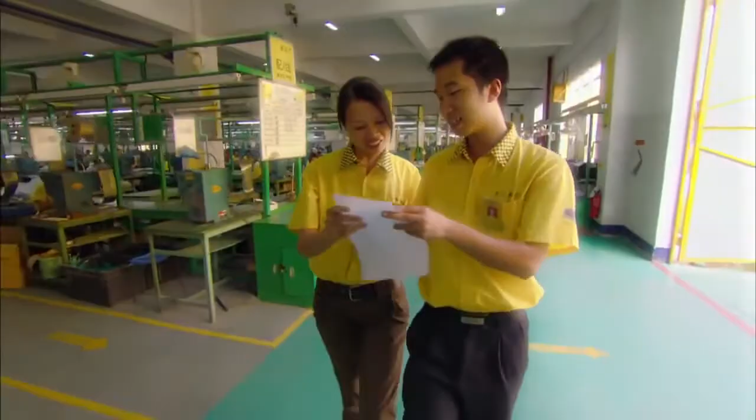What's it like to live where you work? For most of us, that's unthinkable. But imagine living and working at one of the biggest factories in the world, a workplace the size of Monaco. For these 17,000 employees, it's reality. They come from all over China, seeking a brighter future at this factory called Yupa.

Workers craft coffee makers, irons, and electric grills in staggering quantities every single day. But Yupa is more than a steady paycheck. It's home. People get married here, and they send their kids to school here. But the work never stops.

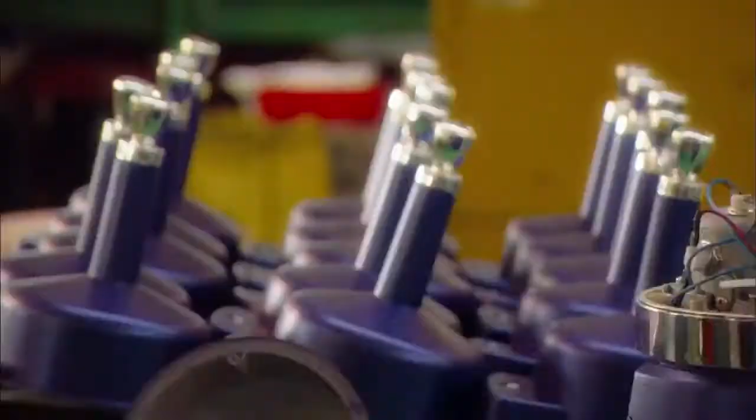Yupa's managers are on a mission to produce new products for every corner of the globe that could forever change the way we think of made in China. Step behind the closed doors of modern China into a factory the size of a city.

Welcome to the place that calls itself Factory of the World. By the time you finish watching this program, Yupa's 17,000 Chinese workers will produce nearly 20,000 electrical appliances.

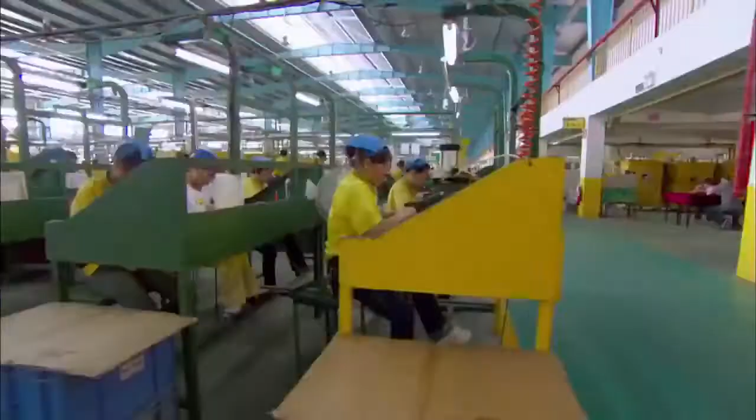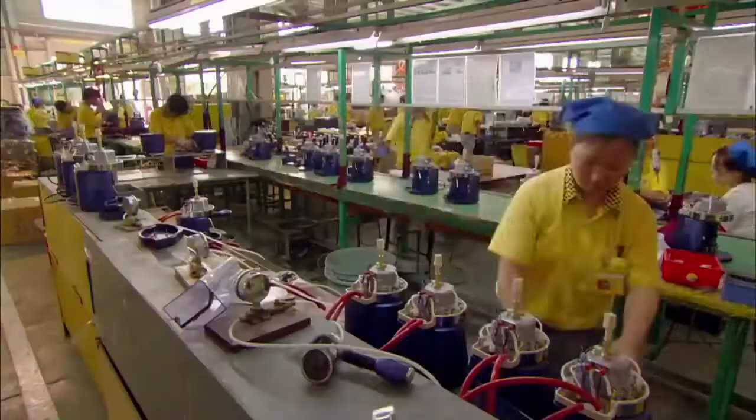Every day they churn out 60,000 irons. Every month, Yupa makes 36,000 coffee makers, that's 2 new machines for every Starbucks on the planet. And every year, these laborers produce a staggering 18 million electric grills. Stacked side by side, they'd span the Atlantic from New York to London.

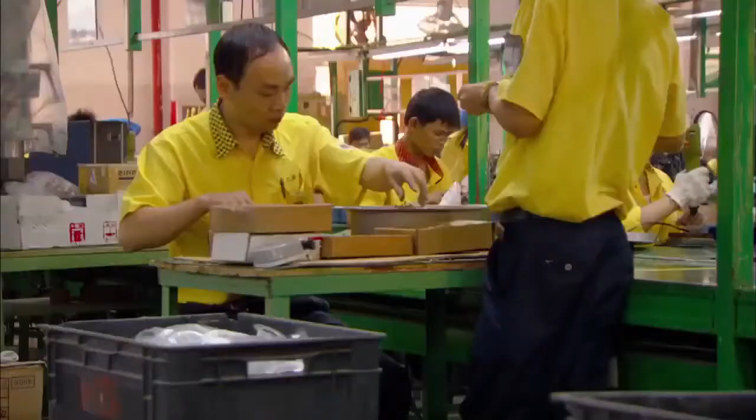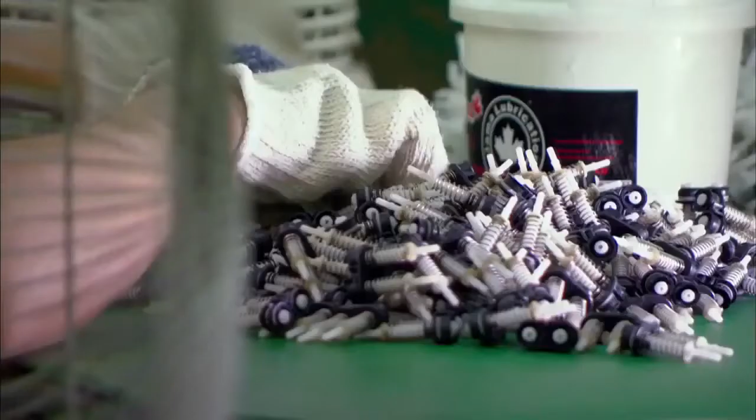Chances are you own something built right here. Factories like these don't exist in North America or Europe, but they're not uncommon in China, where labor is cheap. Yupa runs on human sweat alone. No need for robots. To ensure non-stop production, workers need a steady stream of parts.

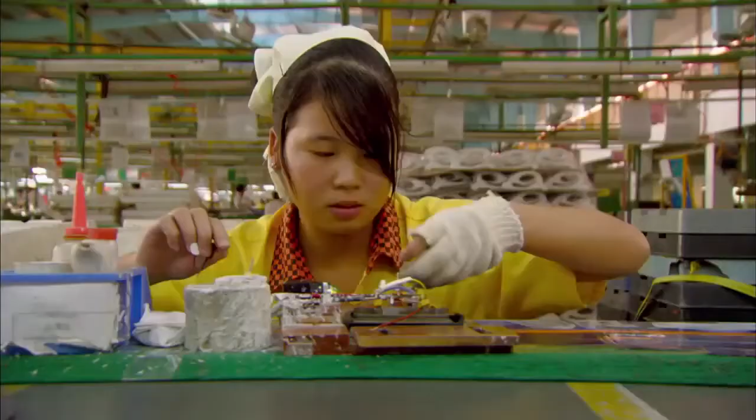The production line cannot wait. We have to guarantee that our production is smooth. Running out of materials would affect our efficiency, affect our productivity, and affect our revenue. So I have to fix this in the shortest time possible.

Today, a problem at the iron factory needs smoothing out. Workers on the iron line are low on a crucial part.

To keep up production, they need 2,000 units, and they need them now.

Just now I found out the main problems here at the iron department. One major problem is the case for model 603. They need 2,000 right now.

Traditional plants use outside suppliers for their components, not Yupa. To slash costs and stay competitive, Yupa builds its own parts on site. So Mr. He's supplier is only a bike ride away.

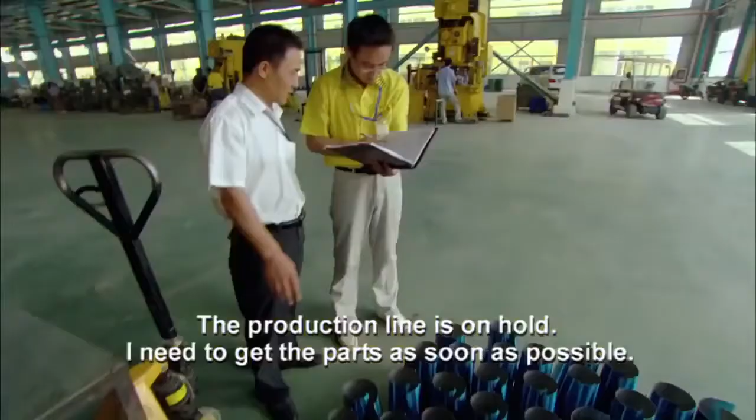But even the supplier is dangerously low on stock. Mr. He has found barely enough parts to last the day.

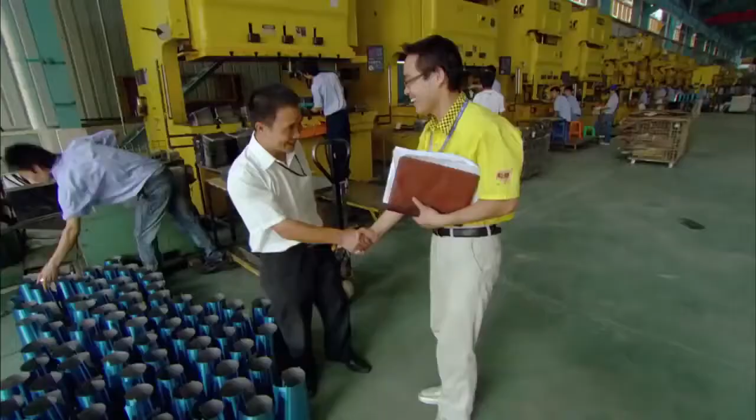Then he gets another urgent call, now the grill factory is low on a crucial component.

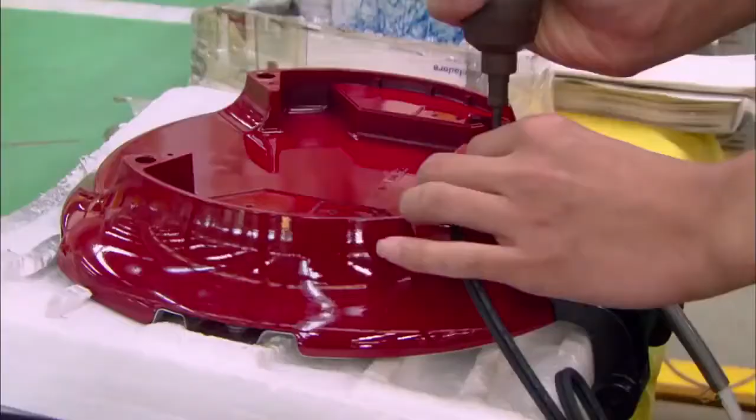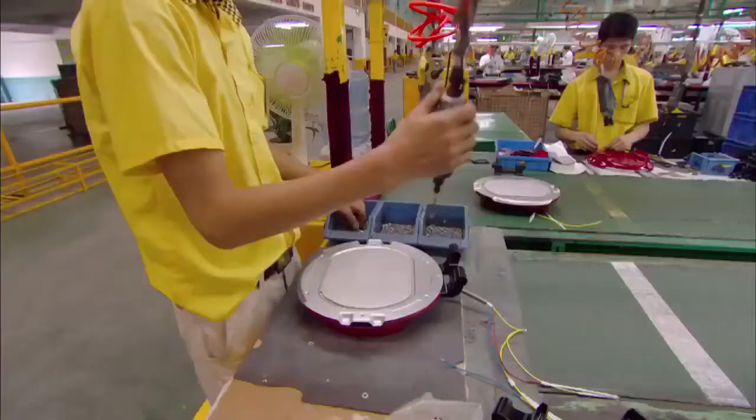Grills are the company's most profitable products. Yupa started producing one line of grills in 1994. Now, 60 assembly lines churn out 800 different models. Workers make one grill every 12 seconds. That's 50,000 grills per day, or 1.5 million per month, enough grills for every person in Dallas. Grills bring in $350 million a year, but Yupa wants more.

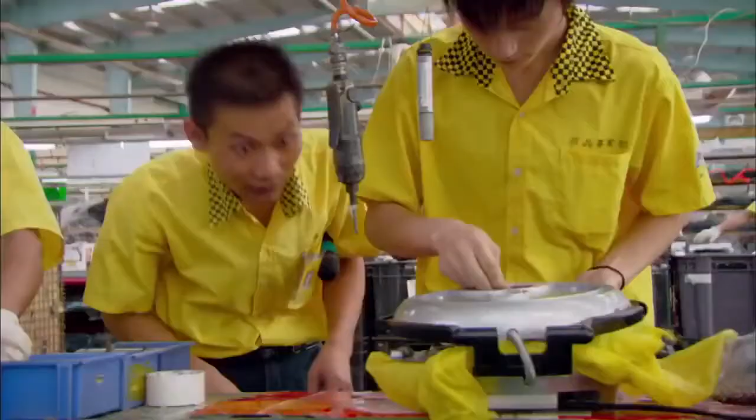Little wonder Lu Jinye acts like a general leading his troops to war. By next year, managers expect workers to crank out $500 million worth of grills. Yupa's profits have to rise to outmuscle the competition.

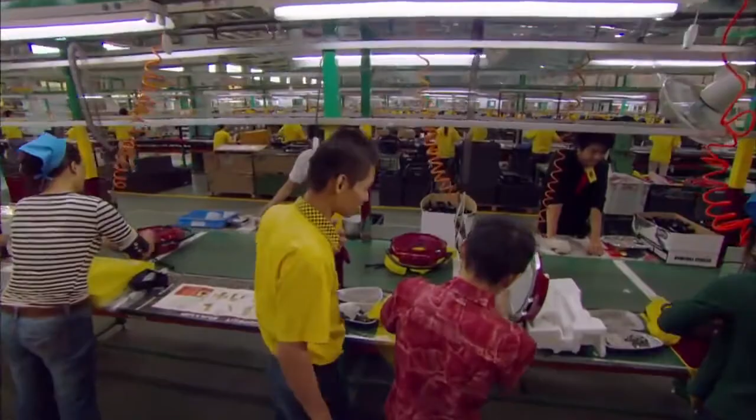Mr. Ye supervises 850 workers on 30 lines. We have to coordinate all these workers and pull all their thoughts into one. It takes teamwork to accomplish our goals, to get the results we want.

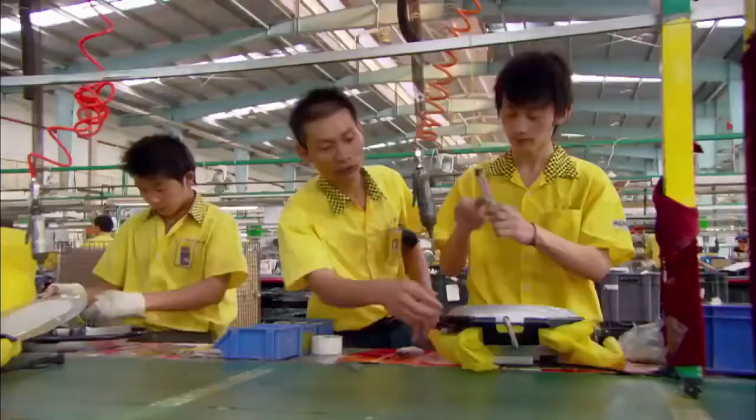Mr. Ye is obsessed with quality control. His aim? Boost output without compromising quality. In a factory this big, with a production run so massive, even the hyper-efficient Mr. Ye hits a roadblock.

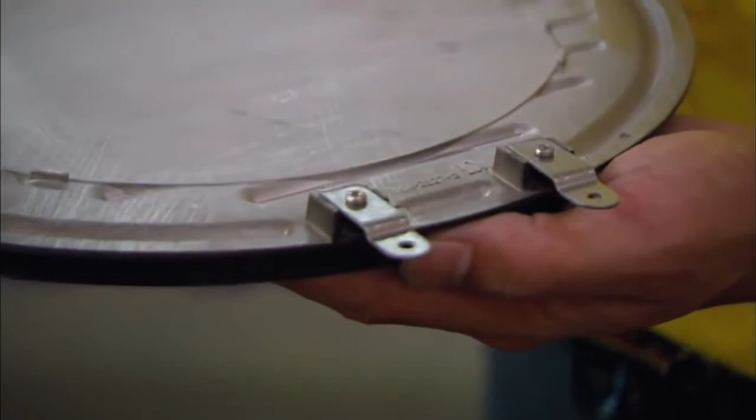This holder piece holds the grill plate. What we're seeing now is the assembly of this piece. The problem is the size. It's the wrong size.

They've run out of part number 2627. It attaches the core heating element to the frame. Without this simple component, assembly lines will shut down, unless Mr. Ha finds a fresh supply, and soon. If we don't get them the parts, 6 production lines will have to stop.

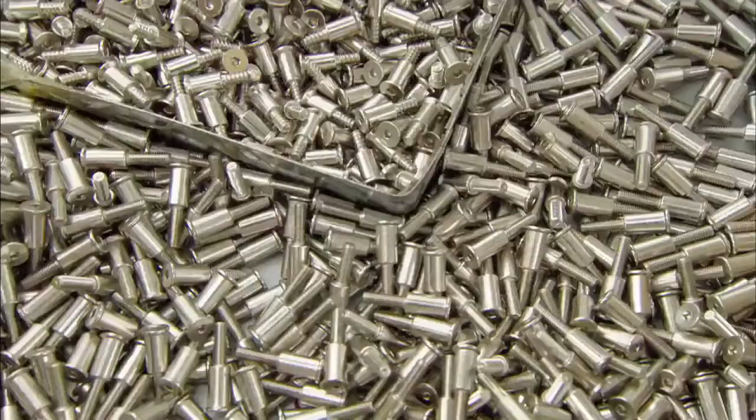When every part is on hand, grills assemble like a simple puzzle. Wires are linked to the heating element, and the element is fixed to the plate.

When it's not locked down properly, it will fall off. If it falls off, it will burn the hands of our customers and consumers. This job is very important.

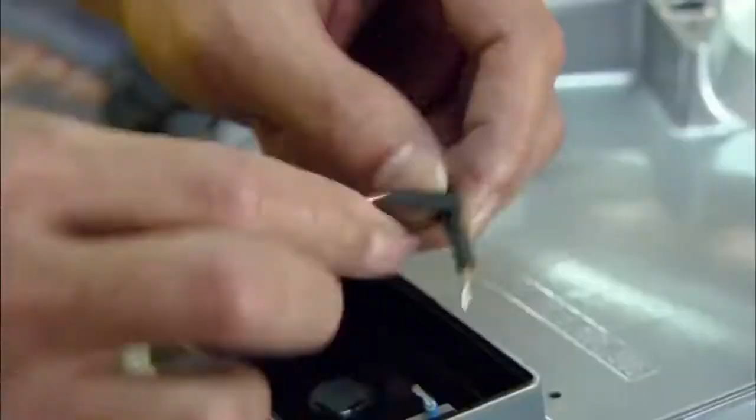Then it's time to connect the power cord. The brown wire is live and the blue wire is neutral. The one with the writing on it matches the brown wire. Connect them and that makes the wire live.

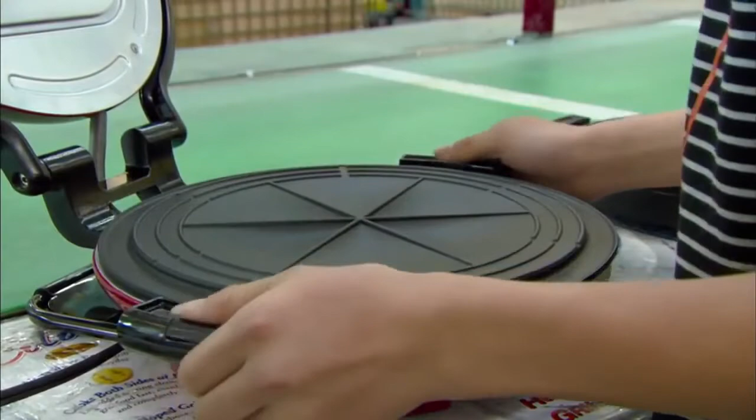Each grill is inspected for flaws in construction or appearance. Finally, every grill is tested to make sure everything is in working order.

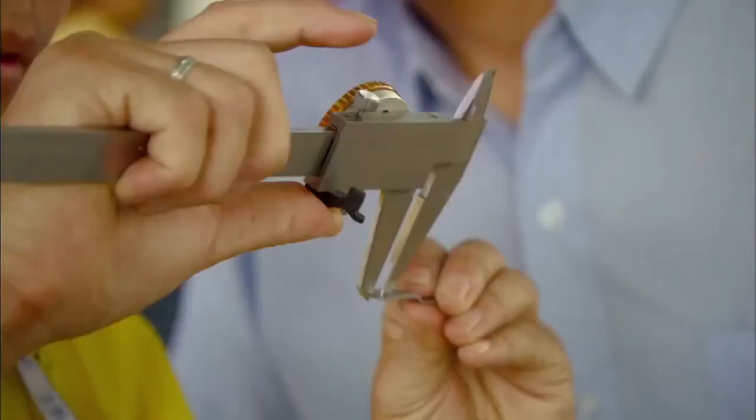On a typical day, Mr. Ye's team must make 700 of Yupa's 50,000 grills. Missing parts cause delays, cost Yupa a fortune, and force workers into overtime to meet their quota. Finding the missing parts falls to Mr. Ha, and the pressure is on.

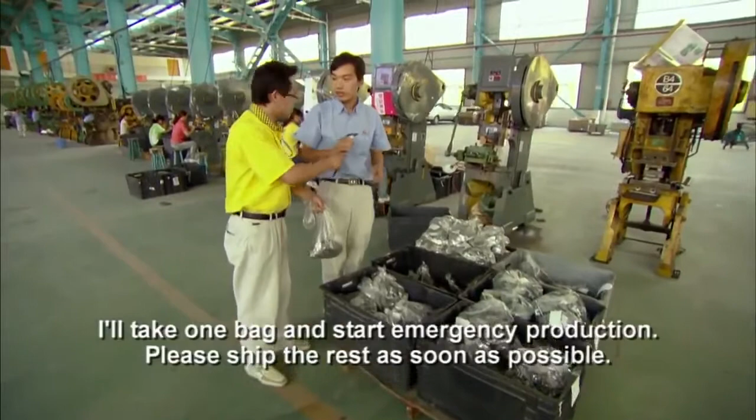Mr. Ha finally arrives, and he has good news.

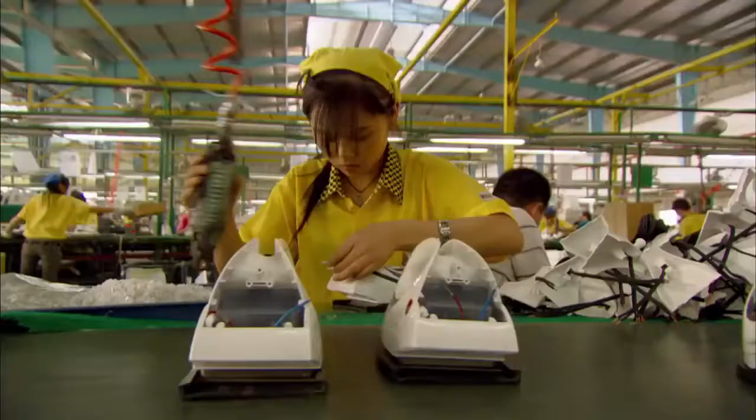It's a place tourists never see. The new face of modern China, competitive, hungry for profits, and ready to take on the world. Located near the city of Xiamen, the EUPA complex sprawls for 1.8 square kilometers, almost the size of Monaco.

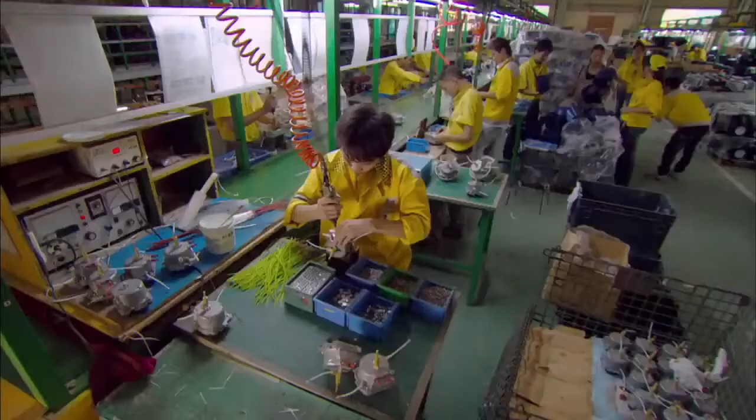We have about over 20 buildings here. The largest building is equal to about 4 football fields. You can have 60 to 70 assembly lines. Each assembly line can have 25 to 35 workers in the line.

25 years ago, there were no factories here, only farms. In the 1980s, the Chinese government decided capitalism wasn't so bad after all. The communist regime established so-called special economic zones, designated places for free markets and foreign investments.

EUPA, a Taiwanese company, moved here in 1988. In a few short years, it became the largest manufacturer of irons, electric grills, and espresso makers in the world. EUPA is a city unto itself, with restaurants and convenience stores, soccer fields and basketball courts, and living quarters for everyone from students to families.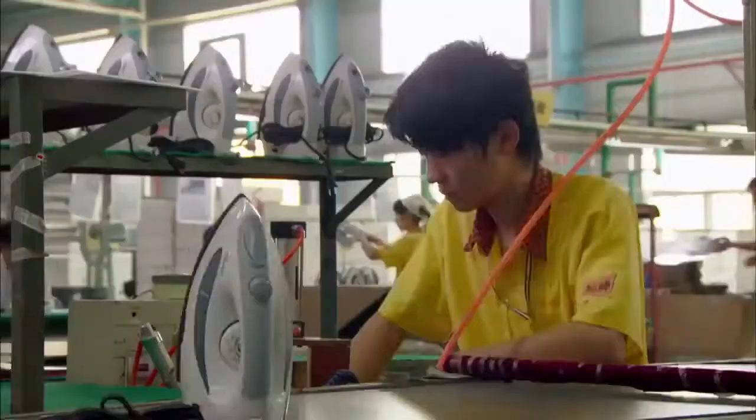Success made it big, and size keeps it successful. Mass production runs push down costs. Almost all parts are made on-site, keeping supply costs low and parts within easy reach.

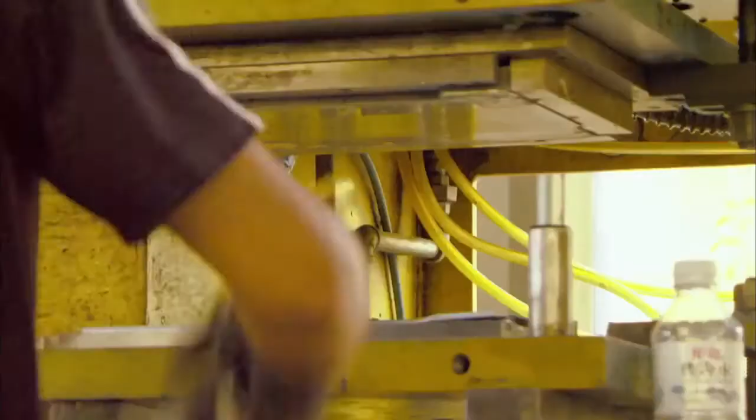Because we are in this location, pretty much isolated, we don't have satellite suppliers surrounding us to build parts for us. So we had to do it in-house, and we had to do it on a large scale.

Yupa's main advantage is a cheap and endless labor force, ready to work for a fraction of a Western wage. 16-year-old Mao Fen Guao left her family and came here in 2008.

But Guao isn't just looking for work. She's here to escape poverty and make her mother proud.

In China, many parents prefer sons to daughters. My mother has only 2 daughters. She's always upset about that. And in order to not let her down, I must work harder and harder.

Guao is a worker in training. With about 1,000 other students, she attends Yupa's on-site trade school. To get here, she had to pass entry exams and pay Yupa tuition. Now she's enrolled in 3 years of study and hands-on training at the factory. If she does well, Guao hopes for a job at Yupa.

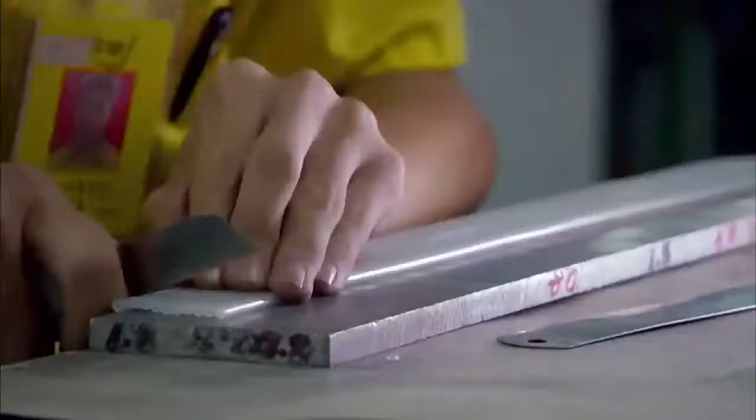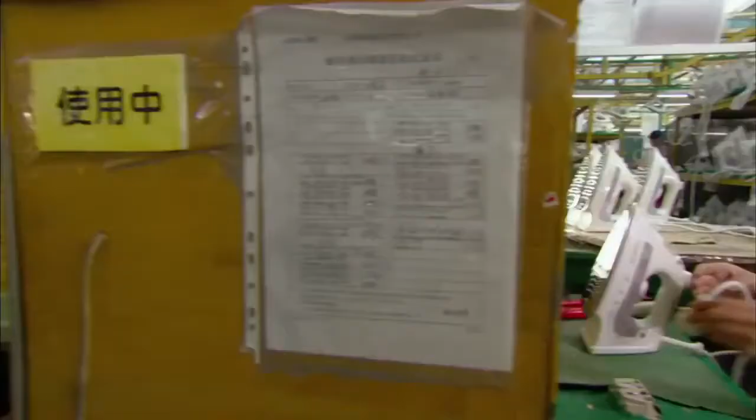To get a job, Guao must learn the ins and outs of every product line. We're changing constantly. Last time, we were making grills. Then we changed to coffee makers, and now electric irons.

Workers on 27 production lines pump out an iron every 15 seconds, and as many as 60,000 irons a day. Production includes at least 10 separate brands for dozens of companies.

With over 30 steps to assembly, iron making is intricate work. And there's no room for error.

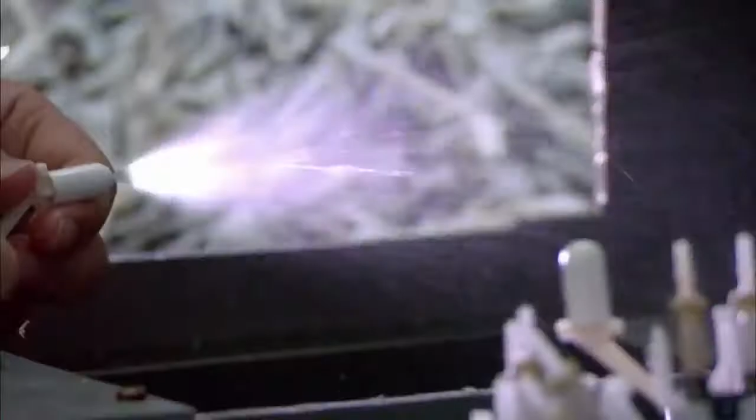Assembly starts with a water spray unit, made up of springs, rubber, and washers. With training and practice, it snaps into the spout in seconds.

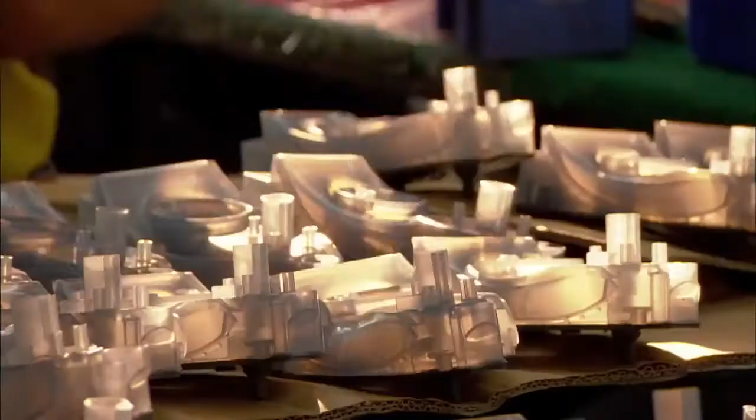If it's not closed tight, it will leak or blow. Then it won't work properly. Now the sprayer and spout are joined to the handle.

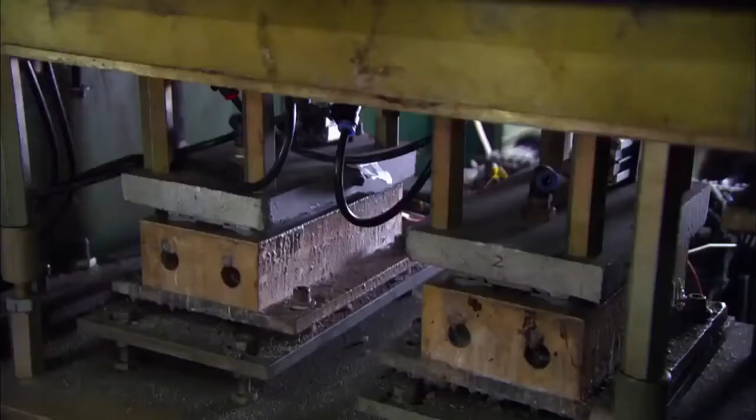The two parts of the water reservoir are placed in a heating machine. That melts the space between them and makes the reservoir watertight.

Welding is an important part of production. However, it will be easy as long as we follow our operational guidelines. Next, the thermostat is attached to the base.

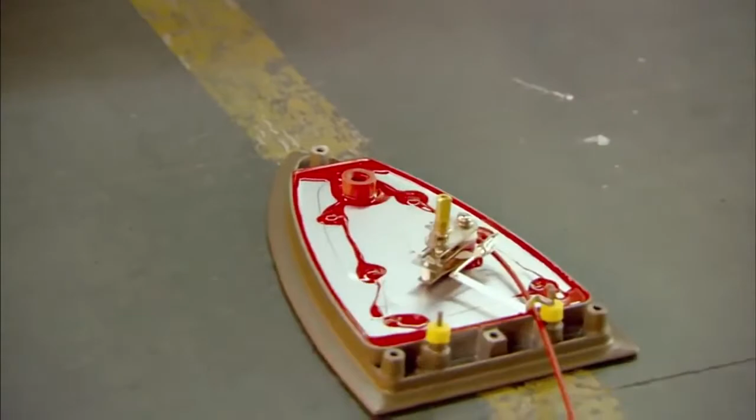You need to make sure you're using the correct format before you insert the base. Using a wrong base can lead to fire. Wiring is also important. Where there is a wiring mistake, there's hidden trouble.

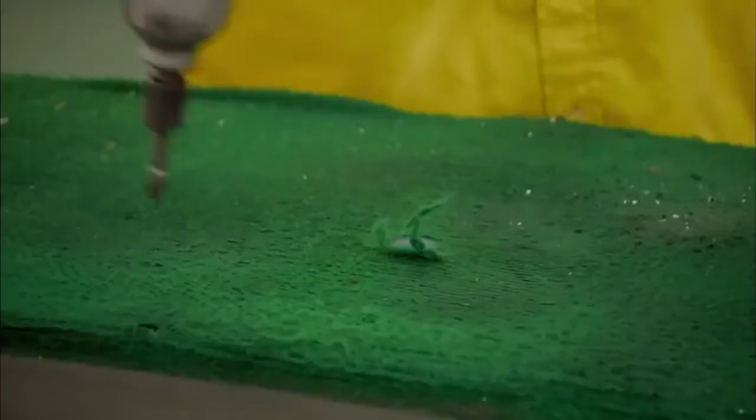A plastic buffer is placed between the heating element and the handle to keep the handle and the user's hand from getting too hot. After that, the plug is welded to the back of the iron.

We're connecting the wire for the power supply. I can do about 4 to 5 pieces every minute and 300 pieces an hour.

Once the spray and steam buttons are attached, it's testing time. First, the steam and squirting functions. Second, the iron's electrical system.

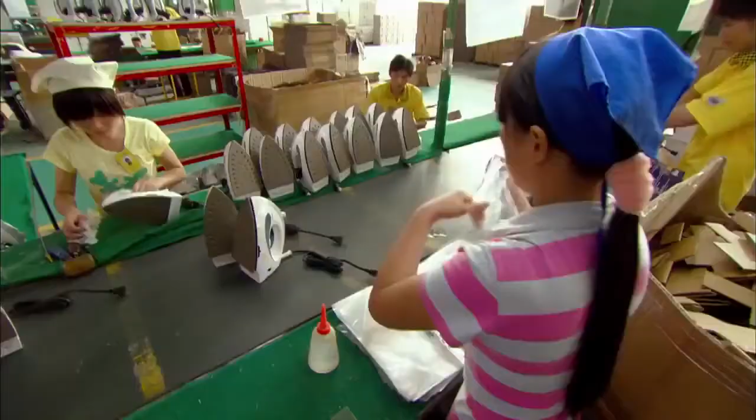Faulty units are either repaired or removed. Finally, irons that pass inspection are packed up and shipped away. The team won't cut corners or settle for second best.

Today, Guo and her classmates will put classroom theory into practice and work the iron line. For a teenager from a small town, living and working in a giant factory can be overwhelming.

My life is not as hard as it was before. I'm getting used to this place now.

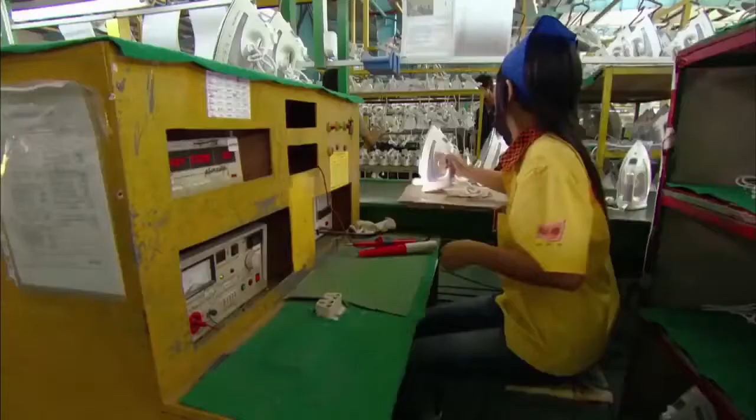Work on the iron line goes better than expected. For Guo, juggling work and school isn't that difficult.

The hard part is leaving family and living far from home.

I guess it's learning how to be independent. When I first arrived here, I didn't know anyone else, and we all have to live together. It was really tough in the beginning.

Like China, Guo is adapting to a new world of high technology and tough international competition. And like China itself, she's determined to succeed.

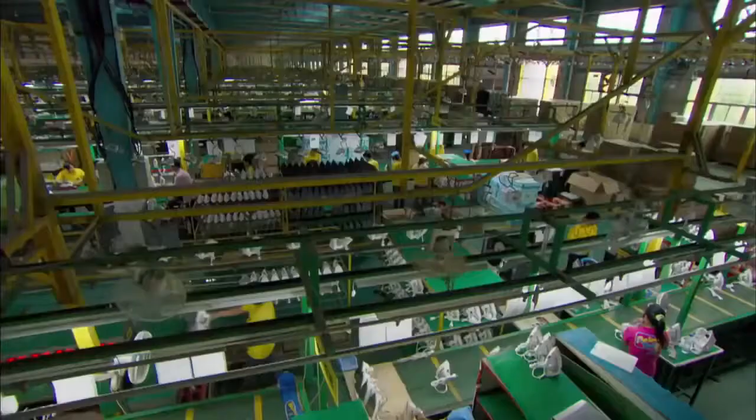I don't see myself working on the production line forever, doing the same job. Maybe I'm a bit arrogant or too confident about myself, but I want a better future.

For some people, a better future keeps them married to their job. Workers at Yupa are married to the company.

Based in southeast China, Yupa is one of the biggest factories on the planet. Today and every day, its 17,000 workers are getting the world ready for breakfast.

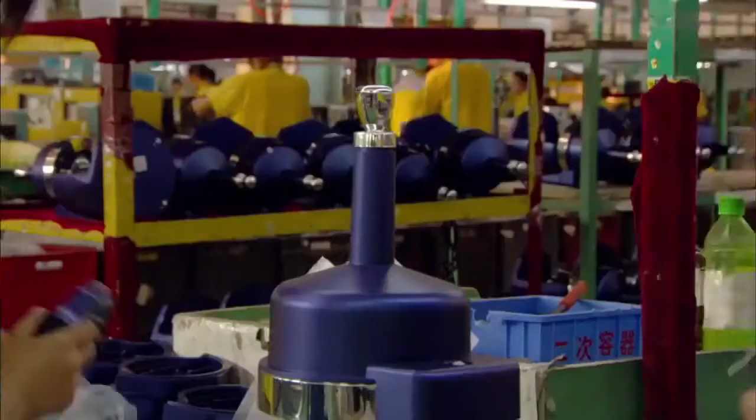In the next 24 hours, it will produce 1,200 conventional coffee makers. Over the next 30 days, these assembly lines will deliver 210,000 cappuccino espresso machines. In the space of 1 year, nearly 2.5 million coffee makers will pour out of Yupa and into the kitchens of the world.

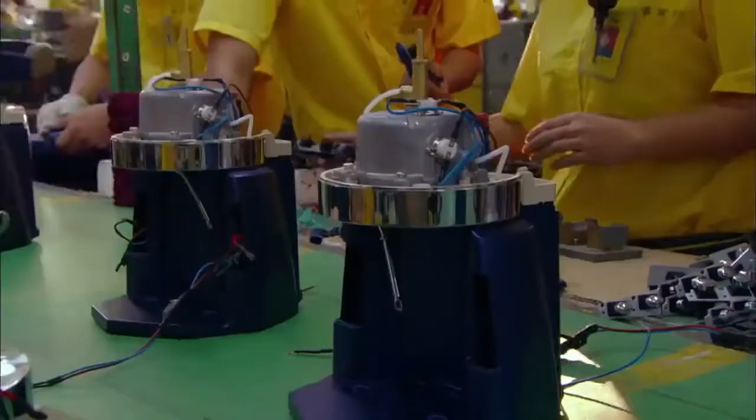At the center of all this is young Lee. We already have 200 or 300 styles, and we develop and add over 40 new styles every year.

Lee's mandate is crucial and broad: tackle any problem that could slow down non-stop production.

We have to make every effort to find these problems and to solve them. We have to make sure that every process is working perfectly. Manufacturing shouldn't be delayed because of these problems.

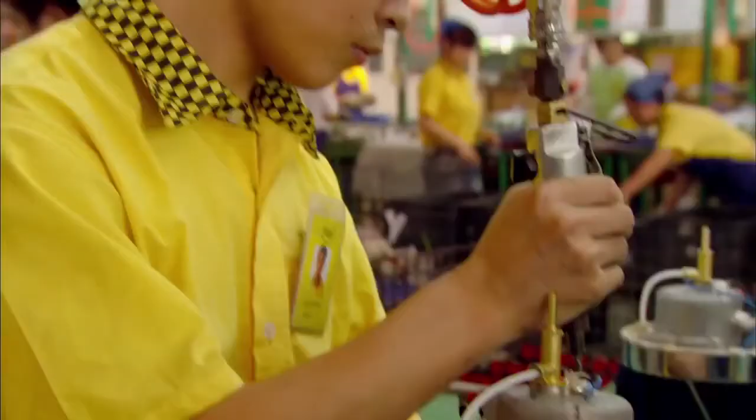Today, he's got a brand new kind of problem. One of Yupa's big clients has designed a new coffee maker. It's up to Lee to build a working prototype to entice the client into going ahead with mass production. Hundreds of Yupa jobs and millions of dollars in potential business are now in Lee's hands.

Making prototypes is a large portion of my job and is vitally important to the development of the company.

Lee starts by assembling the heating system for the water and steam. Then he carefully places it into the main body. Just when Lee's ready to assemble it all, there are parts missing.

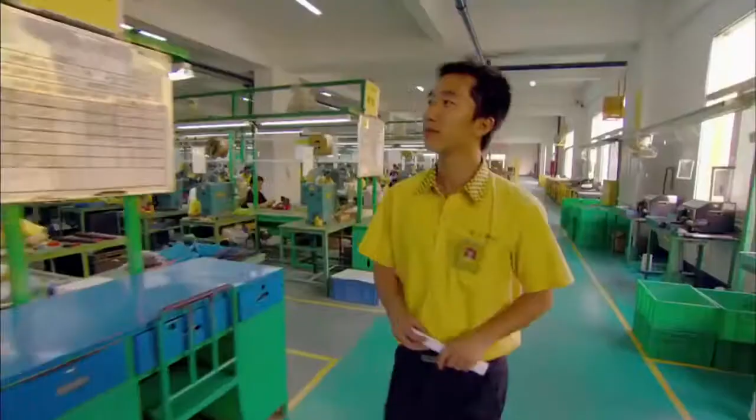The supplier is just a walk away, a long walk, but Lee doesn't mind the distance. Someone special is waiting for him at the supply depot.

The person helping him today is his girlfriend. These perks make Yupa more than a place of work. With a workforce of 17,000, many of them married with kids, this factory city turns office space into personal space.

Sometimes we work together. For example, if we need help from the technician to solve production problems, then we meet each other afterwards.

Li Yang Lee works in the parts supply department. She first came to Yupa in 2004.

We fell in love at first sight. I always think it must be God who makes her work here and wait for me. Even now, I still think the same.

Yupa management encourages these intimate connections. They believe couples that work together are more loyal to the company.

By working in the same company, we can go to work together and take care of each other. We can see each other more often. What's more, we can be with each other when we have a problem.

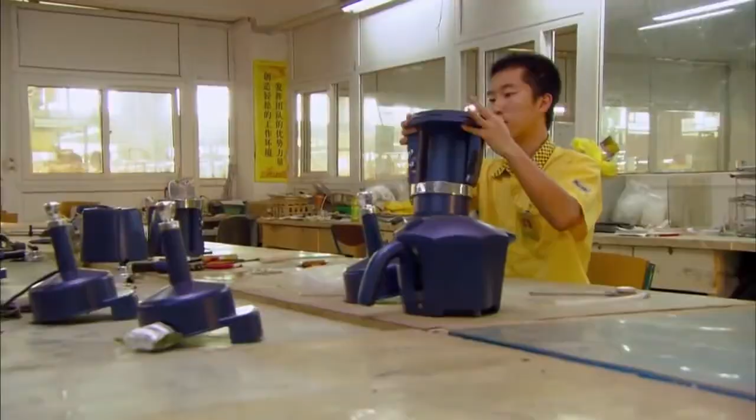With the missing parts in hand, Lee is ready for wiring. Making it all fit into the chamber isn't easy. I will have to organize all the electrical wires properly to make sure the coffee maker operates safely.

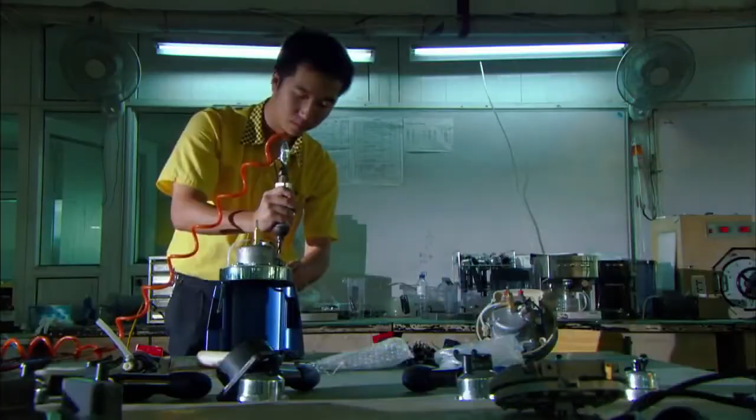But the real test will come after shipping. If the client approves of Lee's model, Yupa could get a massive order. If it doesn't, hundreds of jobs are on the line.

If I make the prototype in a sloppy way, our customers will lose confidence in the quality of our products. It will be a great loss to our company.

Weeks later, Lee's model is approved for mass production, and right away he sets out to create a brand new production line.

It takes a week to prepare the assembly line and train the workers to make the new coffee machine.

Making a coffee maker is not an easy job at all. It requires professional knowledge and a profound understanding of coffee culture.

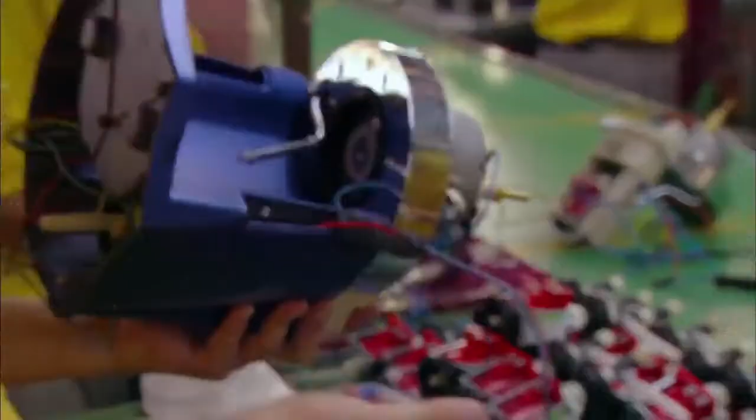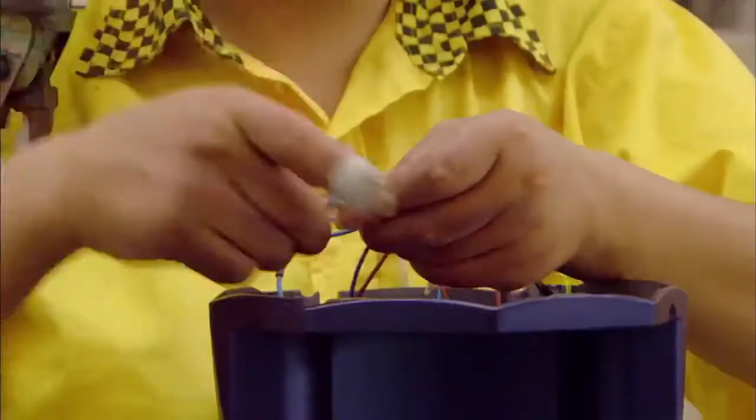When the prep is done, Factory City springs into action and works with astonishing speed. Lee's prototype took half a day to make. Now line workers churn out 700 machines a day.

Lee's shift is done, and when work ends at Factory City, romance begins. When we're done work, we normally go shopping together or take a walk. It gives us a sense of happiness.

The couple plan to get married at a mass wedding, paid for and organized by the company. All at once, dozens of Yupa workers will tie the knot, while thousands of co-workers look on.

If we take part in the group wedding, with the best wishes of all of our co-workers here, we know we will be getting married in the factory of the world, one dream, and that would be unforgettable. A mass wedding is the couple's way of showing their love for each other and their passion for Yupa.

Chef Xingming Li has a passion of his own, feeding the 17,000 workers that power the factory of the world.

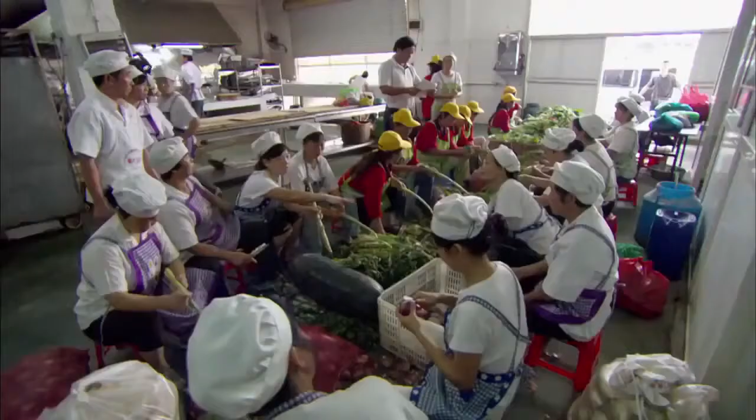Competition between them is intense. Profits are razor thin, and Li needs thousands of customers every day just to survive. In his eyes, he's not just serving meals, he's fueling the workers that power the factory of the world.

If they don't eat well or eat enough, they won't have enough energy. Then they won't perform well at Yupa. It all starts with fresh ingredients: beef, pork, bok choy, onions, carrots, and winter melon.

We have all fresh seasonal vegetables here. Whatever you can find from the food market, you can find here. Everything is washed, sliced, and diced.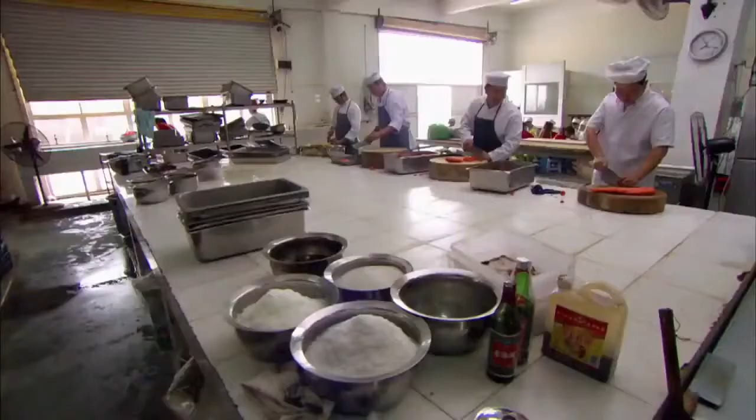Yupa churns out millions of kitchen appliances a year, but there are no food processors in Li's kitchen. Nothing is automated. Everything is done by hand.

By 9 a.m., Li's staff is already racing against the clock. We'll have to finish everything before 11 o'clock because Yupa staff restaurants all open at 11:30. We have to be there in advance.

In 2 hours, 3,000 workers will stop by for lunch. Li expects just as many for dinner. This means his staff of 50 must serve 6,000 meals by sunset.

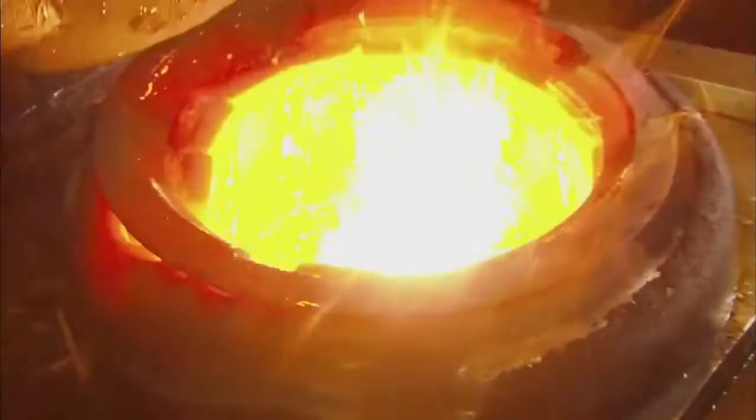We can make different cuisines. Our chefs are all the best of their hometown. They cook up dishes from Fujian, Sichuan, and Henan regions, and they'll soon add halal fare for Muslim clients.

I believe everything that we cook should taste like what your mom cooks for you at home. Li's obsession with food comes from growing up hungry.

My family was very poor. Although my dad was working very hard to earn money, we still didn't have much food to eat.

Now food is never in short supply, and all of Li's clients return to work with their bellies full. Li's passion for food has made him a perfectionist.

He hunts the market for produce that's perfectly ripe and reasonably priced.

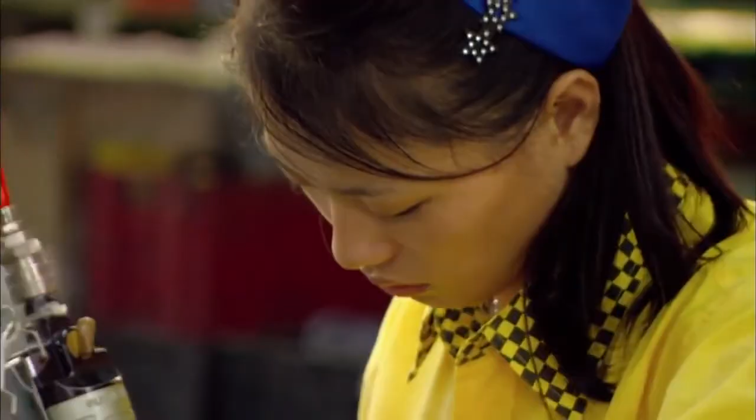Yupa's workers come from every corner of China. Most are in their 20s and 30s. They work on average 40 hours a week and make between $90 and $320 US a month. While wages are even higher in big cities like Shanghai, many Yupa workers make double what they did back home, if they had any work there at all.

As with any mass organization, thousands of employees create endless demands. It's Mr. Fu's job to address all of them. He does everything he can to keep everyone motivated and committed to staying at the factory of the world. Fu visits staff living quarters as part of his regular rounds.

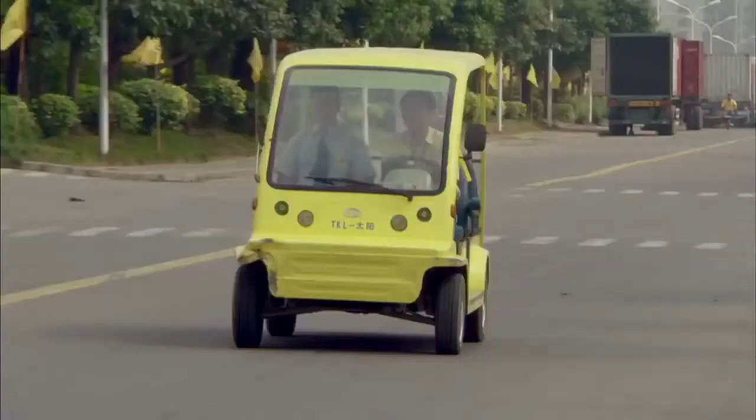Yupa's restaurants are extremely competitive, and some have been known to skimp on meat portions to keep costs low. Yupa has strict rules about when and where vendors can sell their food.

Fu keeps them in line. Now we are going to check on the other restaurants. We have designated areas for them. If they break the rules, I will kick them out.

These vendors aren't trespassing. They work for the factory's restaurants. But they are breaking the rules by selling food too close to rival restaurants. Everyone must have a permit. Where's your permit? Where's the sign for this food cart? Upstairs. Why would it be upstairs? It should be with the cart at all times.

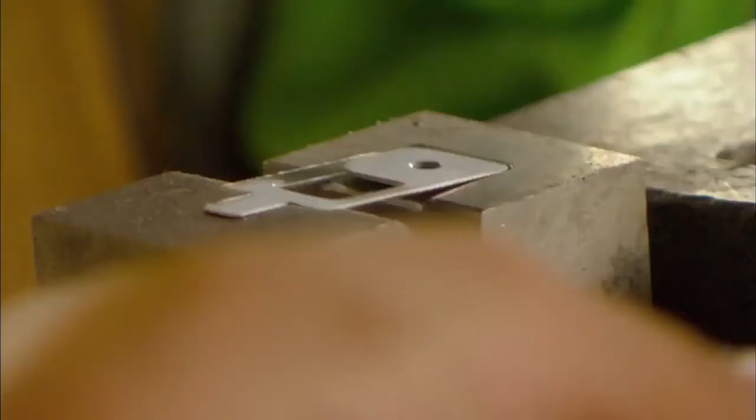In the global marketplace, there's no room for second best. To survive, companies need a competitive edge. Like most China-based companies, Yupa has relied on low labor costs, making products designed by others. But it wants to move up the production food chain. Yupa's leaders want to design products of their own. They have little choice. To thrive and survive, Yupa must develop a new generation of products. The factory's very existence depends on it. Thousands of jobs hang in the balance.

No work means not being able to live. This is a fundamental requirement. It's how humans survive. You have to earn money to make a living, and to earn money, you have to work.

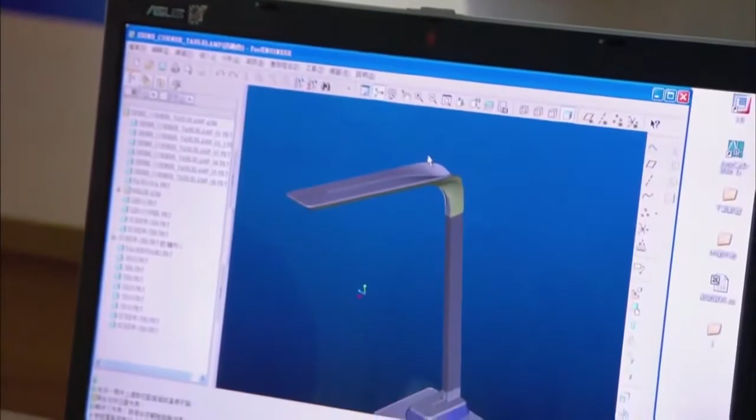Ji-Rong Pan knows how high the stakes are. He is Yupa's Vice President of Product Innovation. I think innovation is the competitive edge of our company, because our company is in the field of home appliances, and the whole home appliance industry is a lifestyle industry.

Mr. Pan sent his staff overseas to study the lifestyle products of the future. They returned with a simple message: the future is green. We studied the consumers of North America and Europe and their thoughts on this new energy of the future. So we know that their love of the earth is actually very strong.

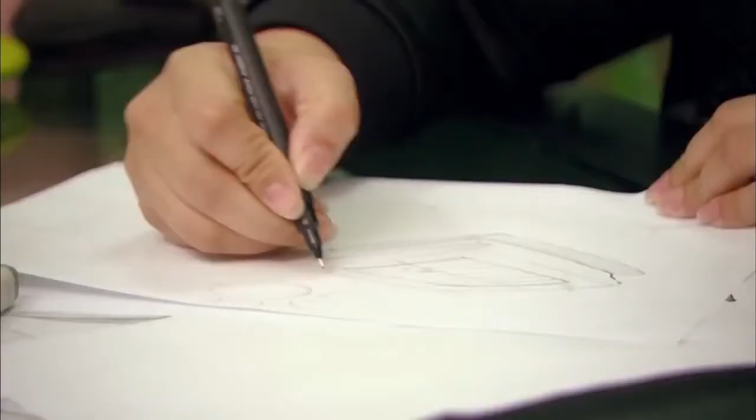Pan and his designers make a bold decision. The first appliance in Yupa's new product line will be powered by the sun. It's a solar lamp. We want to bring this clean solar energy concept into people's homes.

Going solar may sound easy, but solar panels are expensive, and they're meant to work outside, not in the dim corners of people's homes. A 3D image of Yupa's appliance of the future starts to emerge. Now the team must turn a digital design into reality.

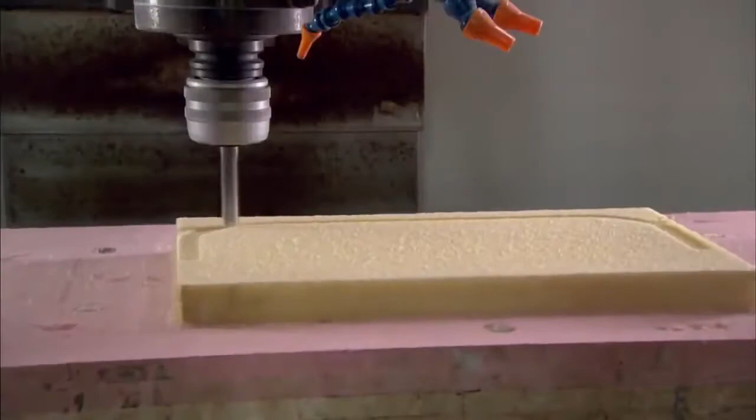This factory is a very important part of our development process. It helps turn a product concept into a finished prototype. Using the design specs, a computerized milling machine cuts a foam cast, and the cast is converted into a hard plastic prototype. If things go according to plan, the model will be used to produce millions of identical copies.

It allows us to test the product to see if this fulfills our requirements while bringing value to the customers. Now engineers perfect the solar power system. The system must collect and store solar energy. Every aspect of design must maximize energy efficiency.

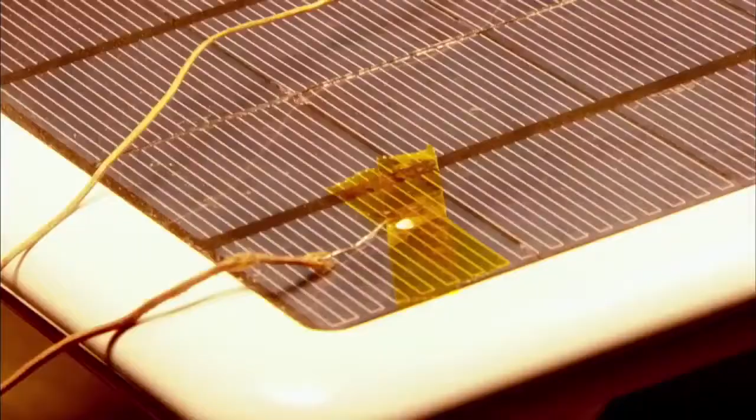We've spent a lot of time studying this. What kind of technology, what kind of material, what kind of parts can help us improve our energy efficiency?

Finally, Yupa's product of the future is revealed. The solar CD player is simple and elegant. The player will charge indoors when left near a window. And the system is uniquely versatile. It will work with any energy-efficient appliance Yupa designs.

But one question remains: will the world embrace Chinese solar products? We want to bring what people originally thought of as an industrial thing and truly integrate it into their daily lives, to enable consumers to truly experience solar energy. This is a very magical energy concept.

If these innovative products succeed, Yupa could achieve its dream, a dream it shares with China, to be the factory of the world.

I want consumers and everyone to have faith in our products and faith in the workers. I hope everyone can enjoy the products we produce. This will make us proud.

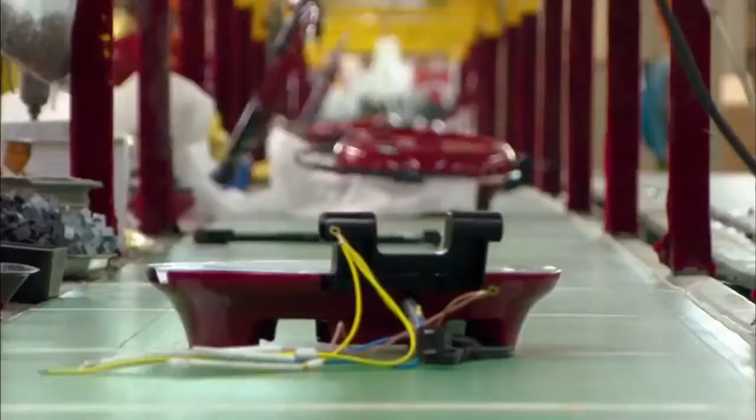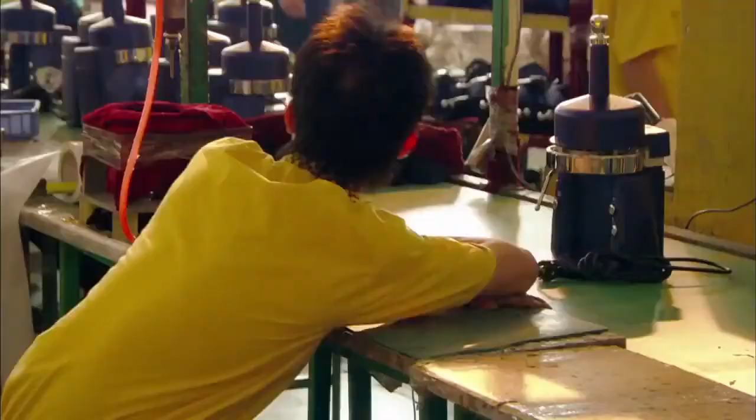With Factory City in full swing and new products in the works, more and more goods will carry the Made in China label. But for China and Factory City, growth comes at a cost. Every day, the 17,000 people at Yupa endure the stress and uncertainty of a cutthroat world economy. To fight off fierce competitors and build a better life, these men and women work and live together as one at the factory of the world.